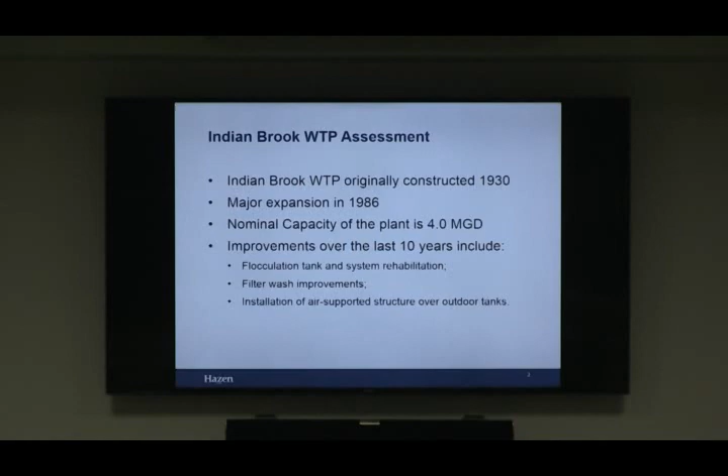The village has been doing a great job maintaining the plant and implementing improvements over the last 10 years to keep it up and running, but it's at the end of its useful life, and it's designed and treating basically 4 MGD.

What is MGD? Million gallons per day—that's the amount of water treated at the Indian Brook water treatment plant right now. Yesterday it was 3.79. It's the beginning of summer, so it's going to get worse over the course of the summer, and demands have been peaking up over 4 MGD.

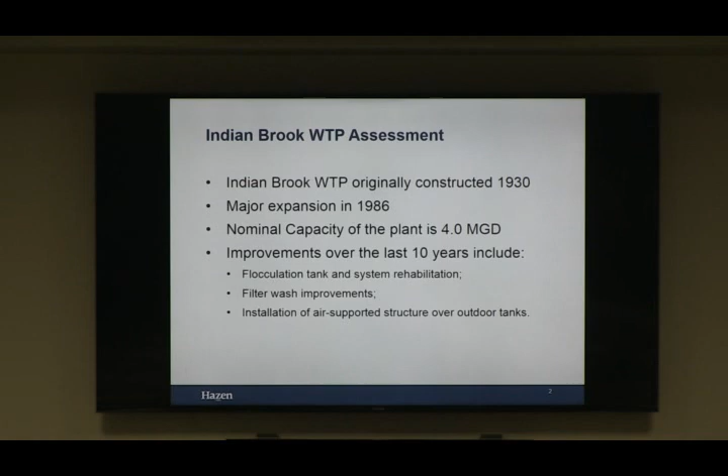So demands are greater than the original design capacity of the existing water treatment facility.

The existing facility and the new facility treat water that is blended from the new Croton Reservoir, which comes down the old Croton Aqueduct to the site, as well as from the Indian Brook Reservoir. The treatment in the existing plant is a series of different unit processes used to bring the water to its final quality.

There's pre-oxidation, coagulation, flocculation, settling, filtration, and then post-treatment chemicals added prior to the water going into a clear well and then out to distribution.

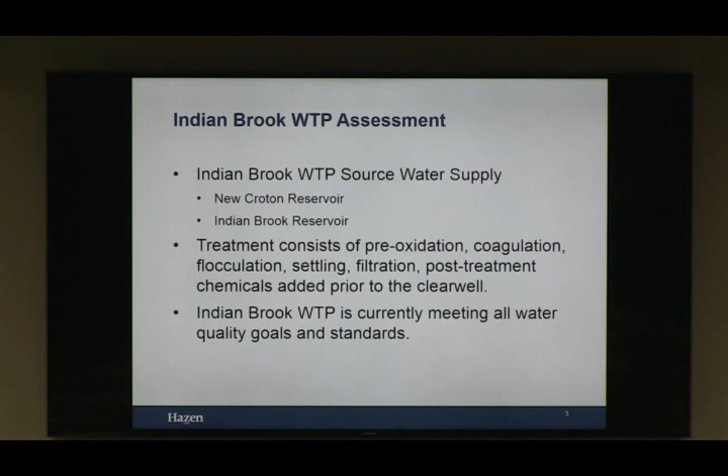Indian Brook Water Treatment Plant is currently meeting all of their water quality goals, but in the future they would likely have trouble as demands increase.

The existing facility is 4 million gallons per day—that's how much water it can treat. The maximum flow predicted in a 5-year projected peak monthly average is 4.5, based on planning information we were given several years ago when studying possible growth in the area and looking at the existing capacity of the Indian Brook water treatment plant.

We also looked out at the plan—4 million gallons, how many people does that serve? Whether it's the village people, the town people, Briarcliff, or whoever. How many people does that 4 million gallons serve? 30,000 people, presently. Thank you.

With the planning information we were given a few years ago, we looked at that 5-year projected peak monthly average. We also looked out 25 years to plan for the future when sizing the plants, and a 25-year projected peak monthly average plus some contingency for emergency conditions, like line breakage in the distribution system, would place the capacity of the new plant being constructed at around 7 million gallons per day.

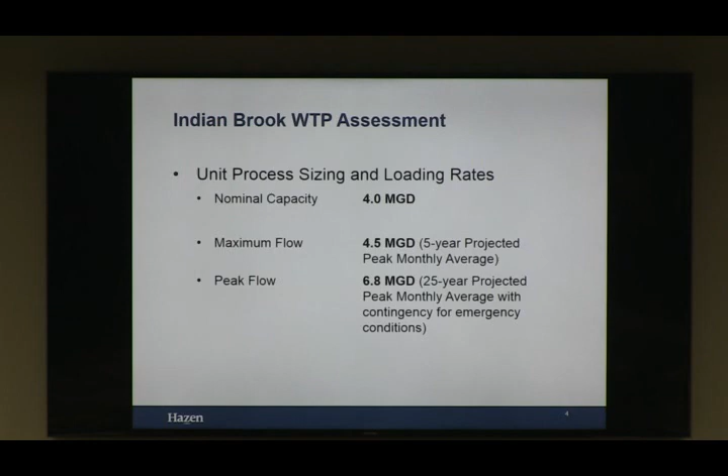This is just showing the different process units in the existing plant. The first thing you do is oxidize the water, then it goes through a couple of stages needed prior to filtration.

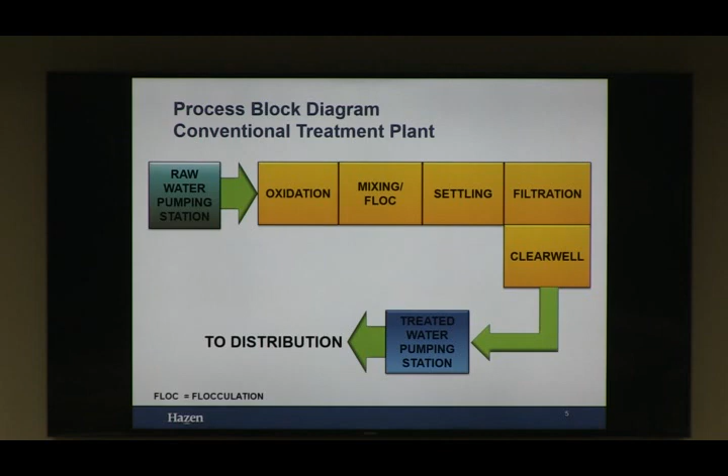So the particles in the water are flocculated by adding treatment chemicals. Then there's a settling step, so the particles are allowed to grow bigger and settle out, and whatever's remaining is filtered in a filter bed, and that water goes to a clear well.

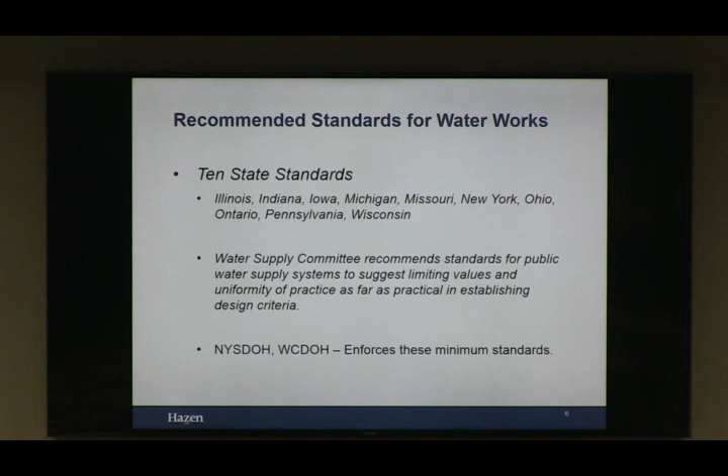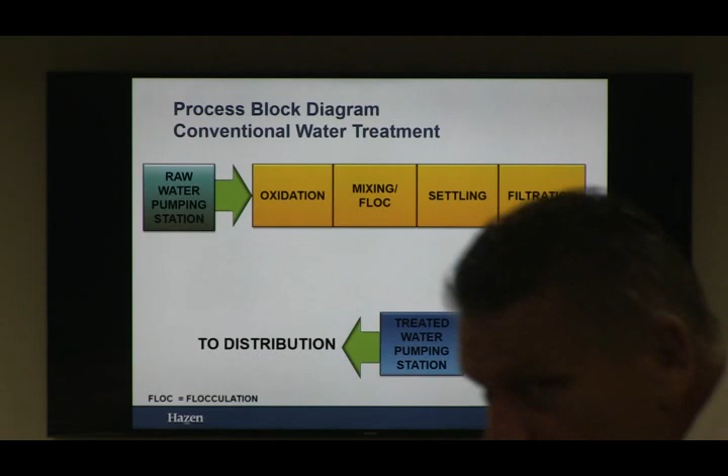When looking at the design criteria for the water treatment plant in any one of these unit processes, we look to meet 10 State Standards—New York State Department of Health has adopted these as the design criteria guideline for treatment. We looked at the existing Indian Brook water treatment plant, and as water demand increases, some of these unit processes won't be adequate anymore.

So for today, with the existing average summer demand, oxidation is sized adequately, mixing is sized adequately, but flocculation, settling, and filtration are not adequately sized for the required redundancy that would be needed, and that would be a situation that gets worse. And the clear well also has no redundancy in it, which is a current 10-state standard or New York State Department of Health requirement.

Sorry, what is a clear well? The clear well holds the finished treated water prior to going out to distribution, and would in this case provide contact time for disinfection.

And the chemicals, is there a list of the chemicals that you put in the water? In this presentation, in the booklet that you have, yes, it would be in the environmental assessment.

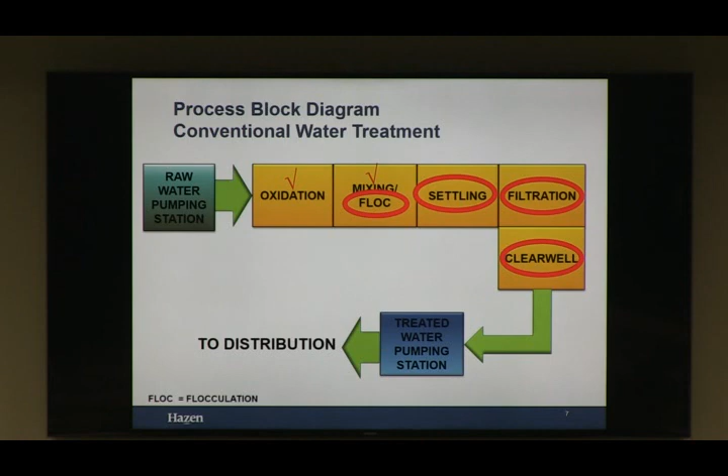So the new process train. I apologize, you're going from 4 million, which we have today, to what size? 6.8. And 6.8 serves how many people? Well, it'll serve 30,000 people, but it's looking out 25 years. To serve how many people, it's in your demand. In the demand projections, we kind of based it on growth. You don't have to give me that number today, but I would like that number. We can formally respond to that.

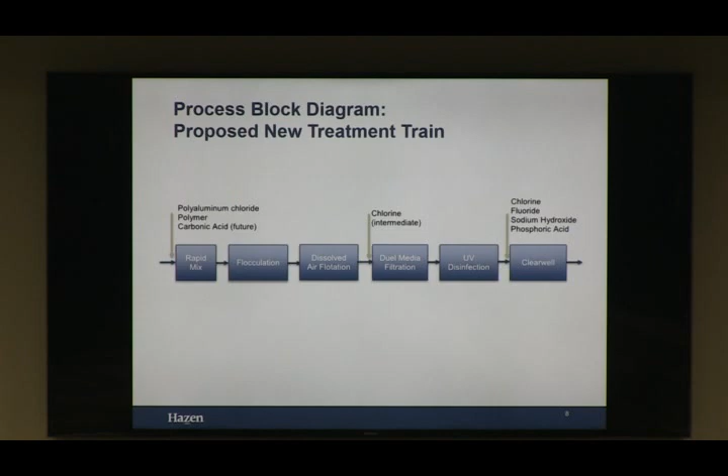So we do actually have a chemical shown here in the process train for the future proposed water treatment plant. So you see the pretreatment chemicals are shown there in the first, the gray arrow showing right before rapid mix. There's a coagulant that's added, that's the polyaluminum chloride, a polymer as a coagulant aid. And then the carbonic acid is not something that's actually in the current design, but could be added in the future for pH adjustment. The water would go into a mixing stage that would just mix the pretreatment chemicals.

Then through flocculation, which I described earlier, which is growing the particles in size so that they can be removed in the further treatment processes. Dissolved air flotation is a clarification process where you inject saturated air into the water and it floats the particles to the top of the tank, and then you skim the particles off the top of the tank. It removes about 90% of the solids in the water, and then what's remaining goes on to the gravity filters.

So the water would be filtered through dual media, sand and anthracite, and then the final water out of the filtration would go through UV disinfection and storage into a clear well prior to leaving for distribution. I mentioned earlier, clear wells are often used to provide contact time for disinfection, so chlorine here would be added for disinfection. And then some of the other chemicals that are added, fluoride, is required in some areas.

What happens if the power goes down in this plant? There's a generator. And how long does that generator last? There's a belly tank on it for 24 hours, and we have a day tank and we have 2 weeks supply. And the generator was just installed 2 years ago.

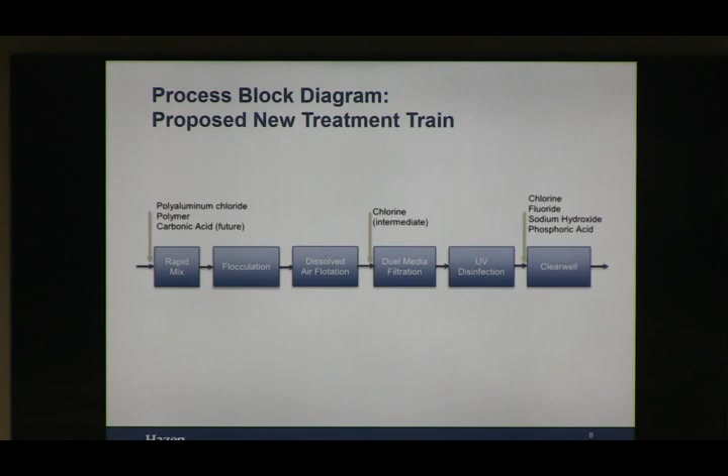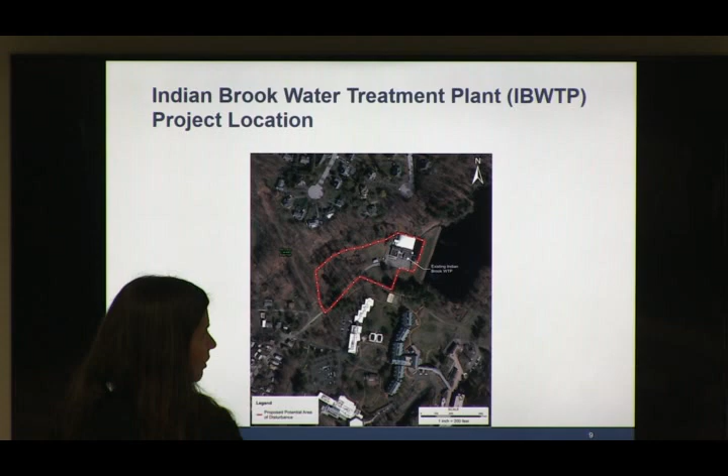This is a temporary structure over the sedimentation basin, and we are looking in this area to have the new water treatment plant located, and here's the Indian Brook Reservoir here with the dam. So if you build a new one, does that white building, which is like a blow-up tent, does that go bye-bye? Yes. Yes.

Lasers don't work on TVs though. Okay, that's the downside of the screens.

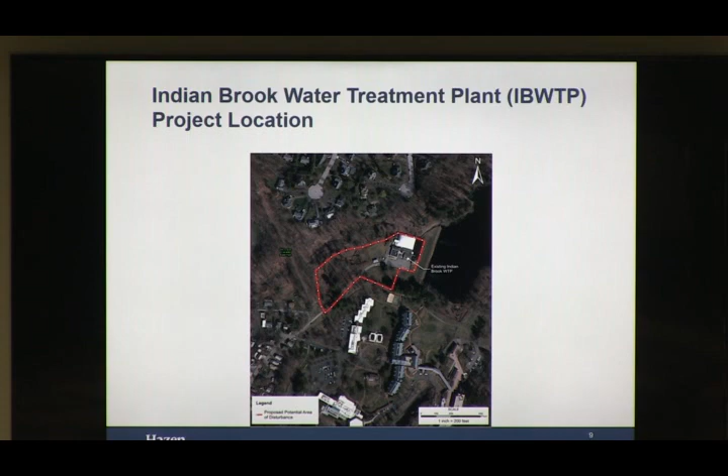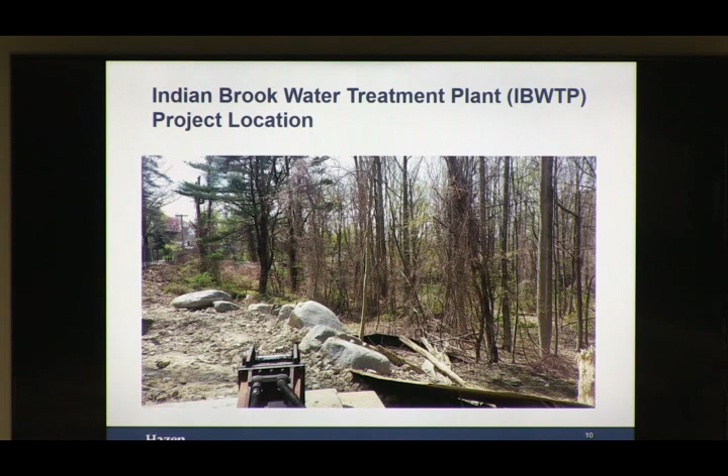Every single tree has been flagged and identified, and would be required to be removed as part of this project. There was a tree survey done last summer, so all the trees were identified that would be impacted by the project, and they would be replaced as part of a program to replace them per requirement for the average diameter of the trees.

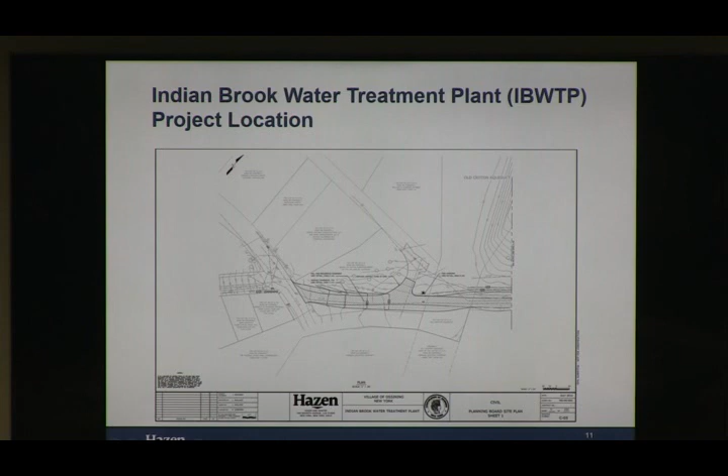So in this area here, we have to widen it in certain areas, but it's basically showing where we'd be repaving the road. This is the overall site plan showing the water treatment plant.

So you're delivering chemicals 365 days a year or whatever it is. Are any of those trucks delivering those chemicals driving on residential streets? Well, the chemicals we're delivering will be the exact chemicals that are currently delivered, but yes, some will obviously be more, for the larger capacity bit, but they have to go through. Right now they're using the same roads at 4 million, and you're going from 4 million to 6.8 million, the equivalent of 2.8 additional tons of chemicals on existing roads.

What are you proposing to do to those roads? I'm asking what you're proposing to do to the existing roads leading up to it, the main private roads, where the people in the town of Ossining have to pay to have their roads paved. Just a question I'm asking—you don't have to answer it today. That's okay.

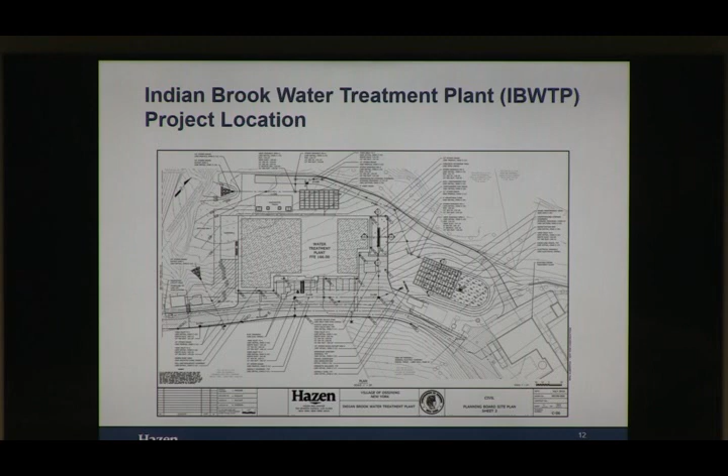Closer to the reservoir, there's one additional building being added. It's a very small building for the addition of potassium permanganate, which is an oxidant. The village has been adding potassium permanganate to the water for years, and although some functions of the new plant will allow for oxidizing certain dissolved metals within the water treatment plant, there are taste and odor issues associated with Indian Brook Reservoir, so we wanted to keep this oxidant in. We're adding it near the reservoir as the water leaves, and on its travel to the new water treatment plant, it will have time to be in contact with the water before entering the new plant.

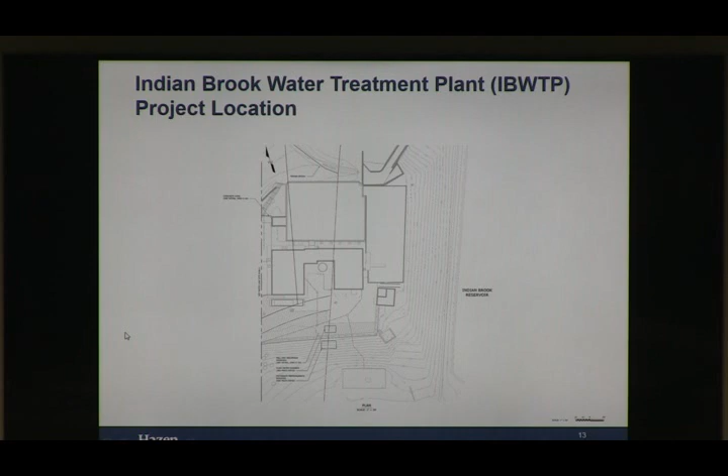Paul mentioned earlier that there was a presentation to the zoning board last month. This site plan was prepared and presented. It shows a couple of items we wanted to point out to the zoning board, and one in particular is the front yard setback, where we're over the 35 feet on the front yard here.

It's about 350 square feet that's over that setback. There's also a wetland on the area, in this section, about 0.14 acres. I have a couple slides that will give exact acreage, and then the town of Ossining buffer for that wetland is shown in this area.

So when you were before the zoning board of appeals, was it just with respect to that one variance, the front yard you mentioned? Correct.

And you're adding how many parking spots to this facility? Eight. One of those is a handicap spot.

It's a stupid question, but it has a thought - do you presently use salt on the roads in the wintertime? The town does. The town does. Okay.

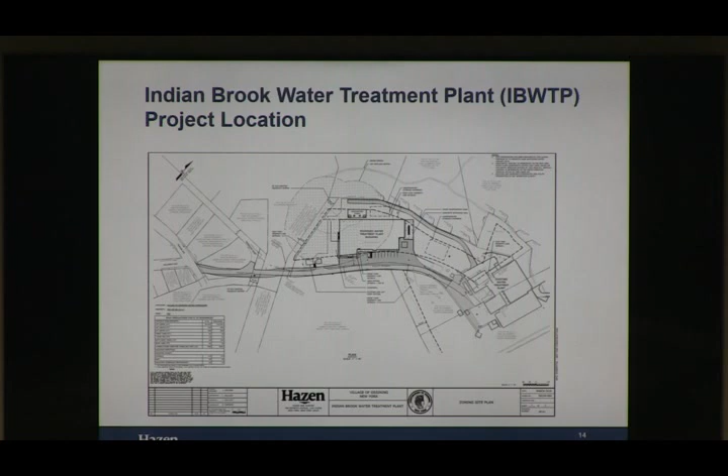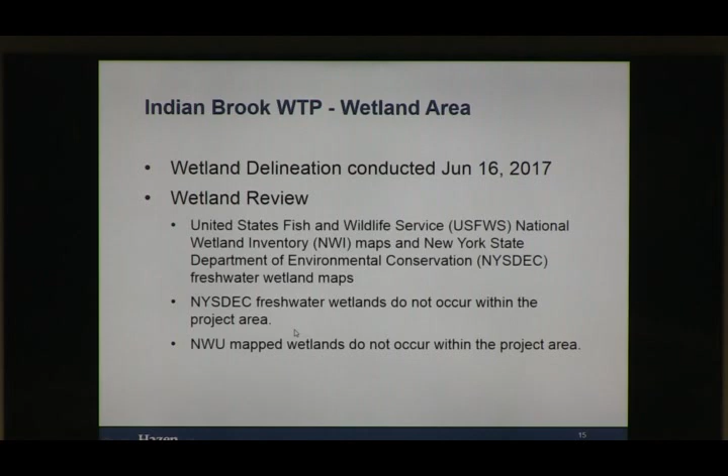Last June, we did a wetlands delineation to identify the extent of the wetlands on the site. We reviewed wetlands maps and looked into the United States Fish and Wildlife Service inventory maps, as well as the New York State DEC maps. This wetland area is not actually flagged as a DEC freshwater wetland or a fish and wildlife wetland.

So although it is a wetland, it's not identified by those regulatory agencies. As mentioned, the wetland size is 0.14 acres. It's hydraulically driven by what we believe to be a spring or seep located downslope by the pump station of the existing plant, and we're going to wind up impacting it through construction since part of the water treatment plant is sitting in it.

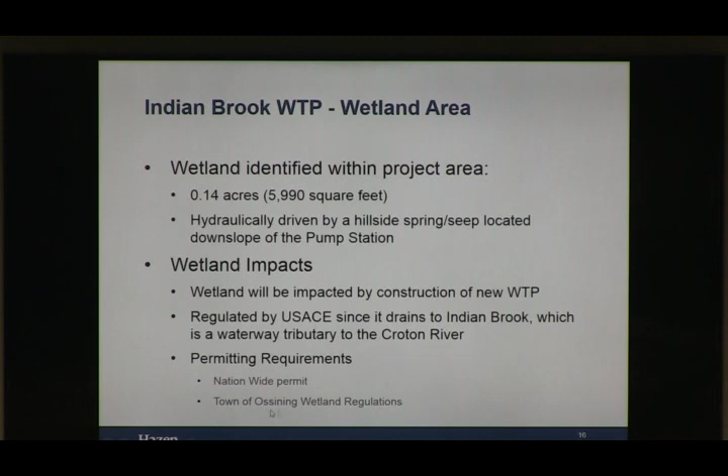So we'd be looking to mitigate the impacts. The permitting requirements are a nationwide permit, and of course the town of Ossining wetland regulations. For mitigation, we'll have to do a one-to-one mitigation, not of the 0.14 acres of wetland area, but the buffer area around it, which comes out to about an acre.

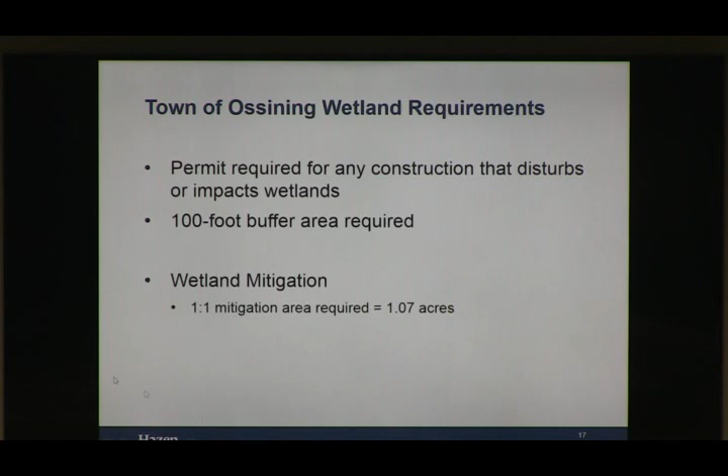As mentioned earlier, there's a number of trees that are going to be disturbed. The area spreads out over an acre and a half, specifically 91 trees. The mitigation requirements are to replant 50% of the total aggregate diameter of the trees, and we'd be working with the town and village of Ossining on a tree restitution plan, which would include some on-site plantings but could also include off-site plantings.

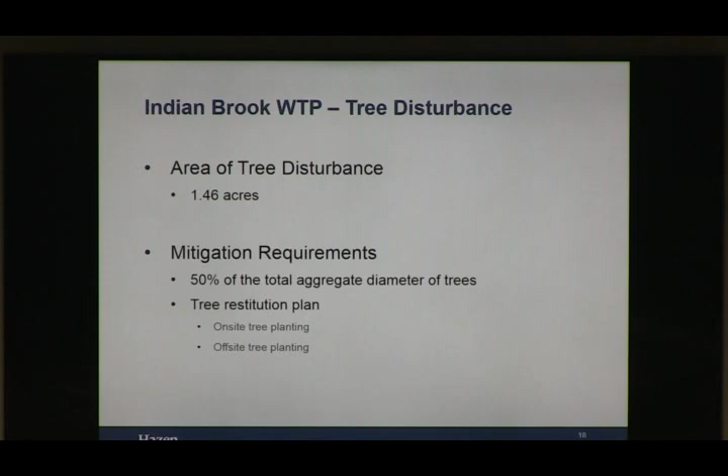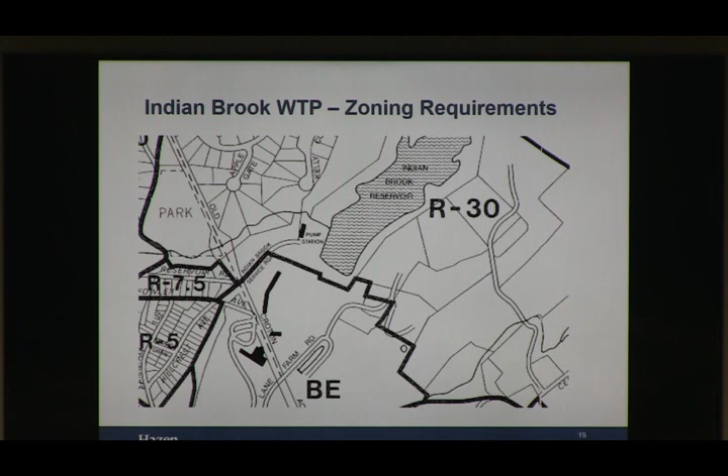So the water treatment plant falls in R30 for zoning requirements, and the R30 requirements are shown here. Specifically, I mentioned the front yard setback of 35 feet - we were a bit over that one. The rear yard setback, we fell within, and the height requirement, where the stair tower is at 34 feet, and the height requirement at the base of the building is 35 feet.

What is that stair used for? To access the various levels of the water treatment plant and the roof. And since there's a green roof up there, the maintenance people working the plant would have to get up there more frequently than typical.

There's also HVAC equipment on the roof. In the tower from the ground, how many feet above the roof is that tower above the roof? 14 feet, with the parapet, about 15 feet.

I'd like that dropped down - a legal height of a door is 7'6", I'd like that to be 6'8". Dropped to 6'8", yes. And maybe a 9 foot high ceiling instead. I mean, it's too high - it's too high for a residential neighborhood.

It's just the one first comment I'm giving, I know I'm going out of sequence, but the tower's just too high. Okay, we will definitely look at how much it could come down while still allowing for code height. There's 2 levels of the roof.

There's an upper roof level and a lower roof level, so it doesn't have to be an enclosed stair - it can be an exterior stair. You can talk about it later.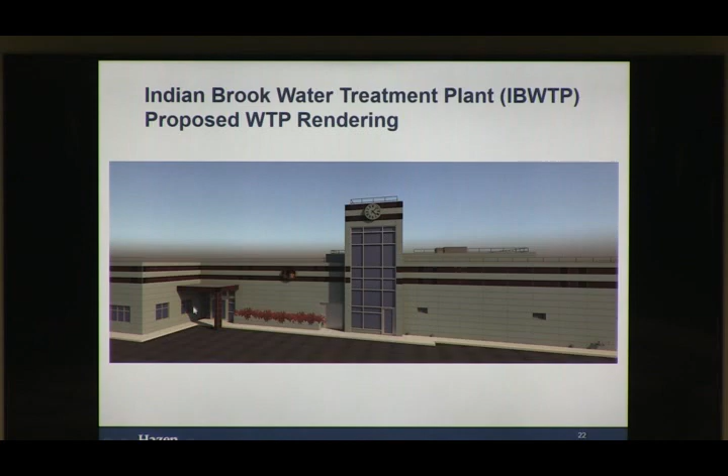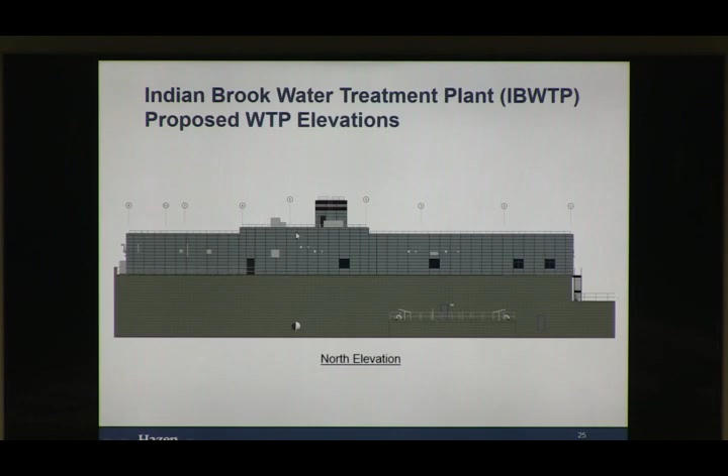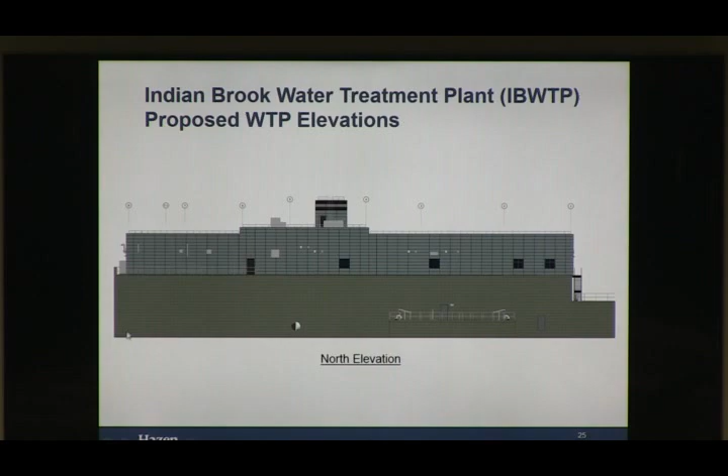Then the north elevation is basically the back of the building that I was describing before. Since the site drops off steeply, right about here is the grade that matches up with the road. Then the lower level, which is a lot of tankage in this area of the building, is exposed on the north elevation. There's also a tank back here that holds wash water from the filters that's recycled back to the head of the plant.

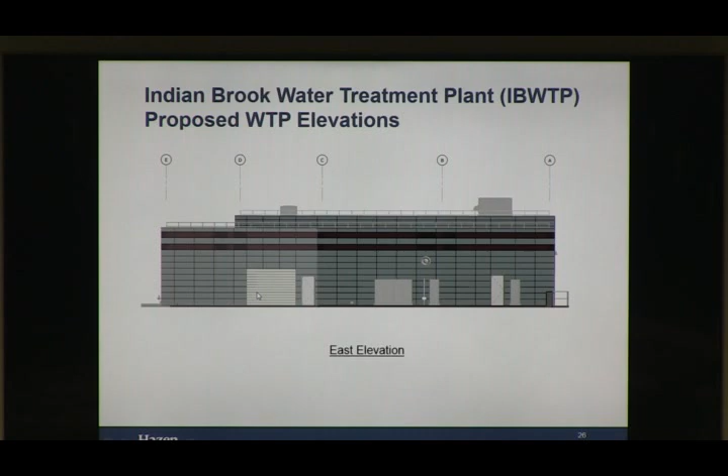And then last is the east elevation, and this is the area where the chemical delivery trucks would pull into and unload chemical. There's cabinets for different chemicals on this side of the plant, and there's a roll-up door that would allow for equipment to be brought in and out of the plant.

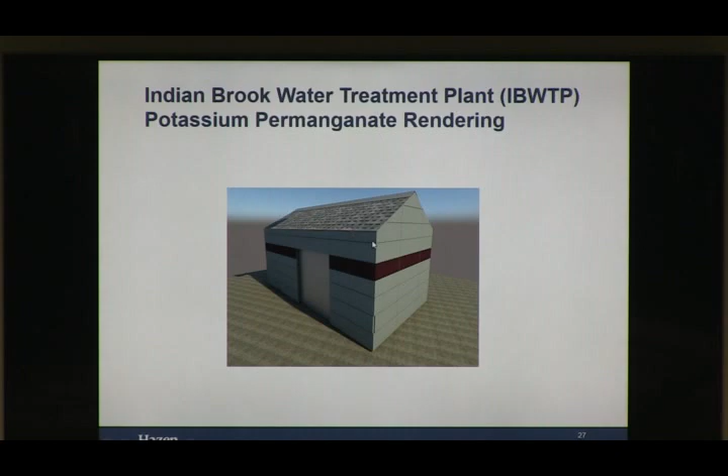And the small building that's located over by the Indian Brook Reservoir would be a facility containing potassium permanganate, and this is a rendering of what the facility would look like. Right now, the proposal is to have terracotta rain screen located on the...

Are any of those chemicals able to cause any type of fire or explosion? So the chemicals are non-flammable, every single one of them.

And your report shows that for every single one of the chemicals? They're non-flammable, but we have located sprinkler systems in the chemical area. I would like to see in the report, in big red, that every single one of those chemicals being used is not explosive or dangerous if, God forbid, something happens to that building.

Okay, I mean, there's... we provide the residents that live nearby with SDS sheets for them, so that they can get the information they're looking for. I just know off the top of my head that they're non-flammable, but I don't want to speak to every single characteristic of each chemical, but we can provide the SDS sheets.

So the cladding for the building is this terracotta rain screen. It's being located on the whole entire upper level of the building, and then the lower level, as we're showing around the back of the building, or the north elevation, would be concrete on the lower level, which is the outside of tanks for most of that part.

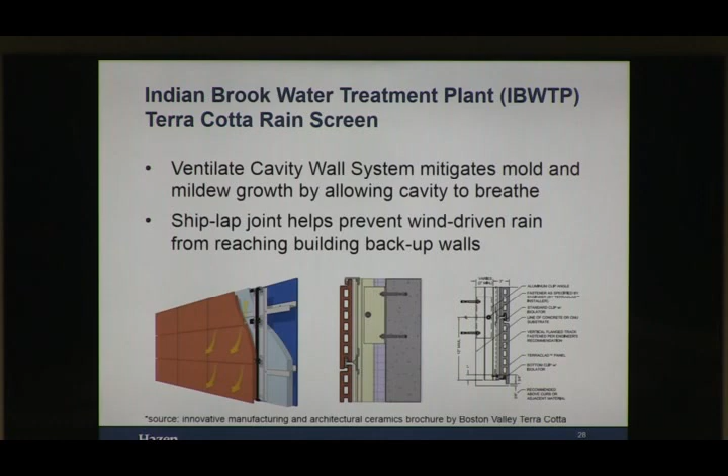And then I started talking a little bit about the green roof already. There's a lot of benefits for the green roof, other than stormwater management. It also mitigates heat island effects and keeps the building cooler. It also reduces dust and smog levels by trapping particulates, and it reduces the rainfall volume and stores some of the rainfall before it's released on site to the storage chamber I was pointing out earlier.

And most importantly, the reason why we added it was for filtering the stormwater to provide a certain level of water quality. In addition to that, it's more attractive to have the green roof on the roof of the building for neighbors who are located at somewhat of a higher elevation on the other side of the tree line.

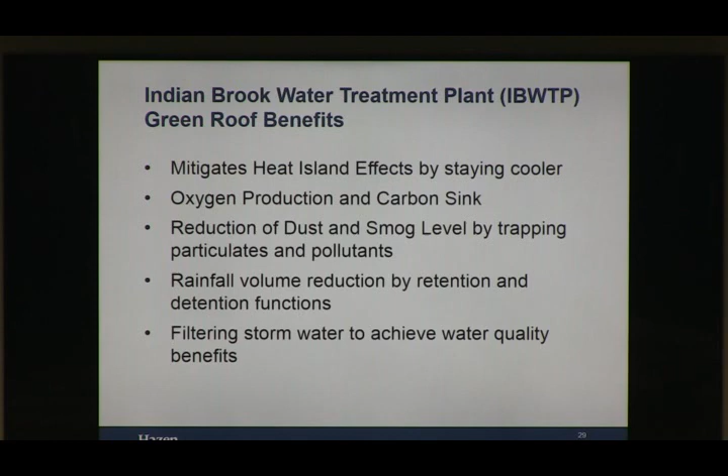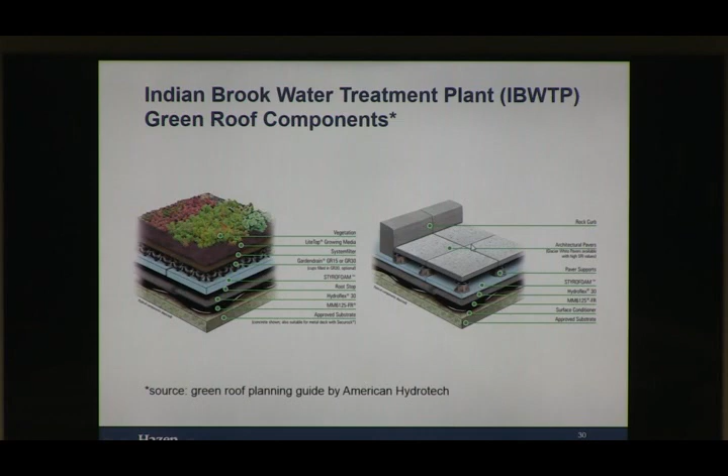We do actually have a sample of the green roof. We might be premature at this meeting, but we have a sample with us. It shows the layer system of the green roof, and in the areas where we wouldn't have green roof, it would be a similar system, but we'd have pavers.

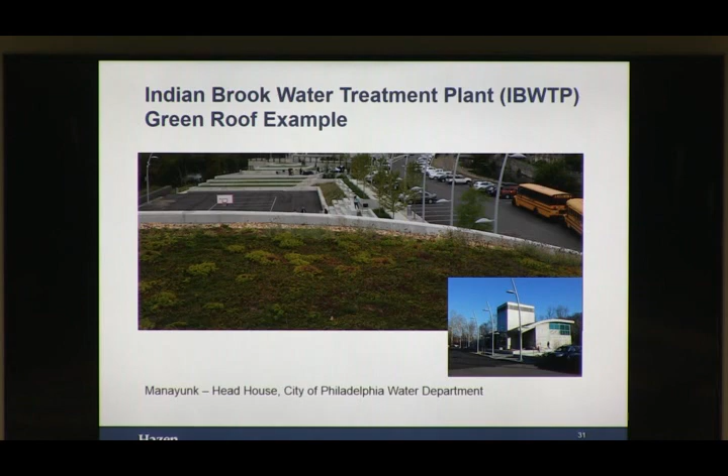And this is an example from a project that was recently completed, a pump station in Philadelphia that we designed, and this was the final product of what the green roof looked like. Usually, species that are appropriate for the area are selected, and they would need to be low maintenance species as well.

And then our next steps, we believe, would be, once we're through planning board, we would meet with the zoning board, and then we will submit the project to the Westchester County Department of Health for approval. And I can take any questions at this point.

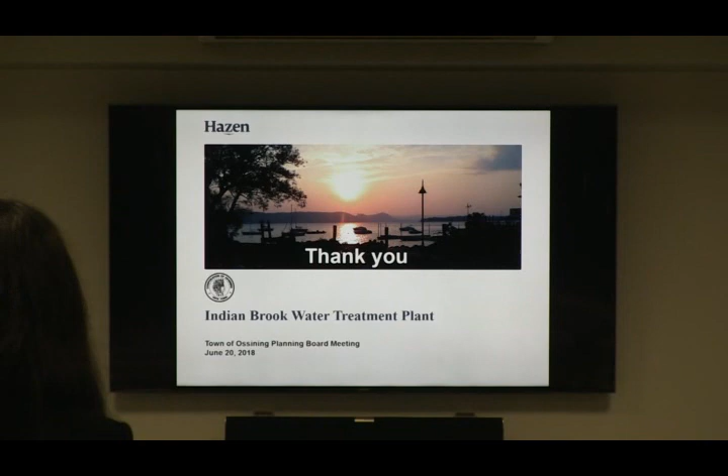Any further questions? Do we need to take any steps here at this point? It would be good for the planning board to declare its intent to be the lead agency tonight, in terms of the SEQR process. So you might want to adopt a resolution to that effect.

Okay, is there any members of the public who wish to comment at this time? Okay. Anybody want to make a motion?

So I have a few questions, if you don't mind.

First of all, I want to say that Ossining's water is already really great. It meets all the standards. I read the brochure sent out annually, and the numbers are all good. Since they're all below national and state standards, one question I have is, will this new technology improve those numbers still further? Or are you just going to target the same levels, for things like lead and other heavy metals, cadmium and so forth?

So the dissolved air flotation clarification process will provide some improvement over the sedimentation process in a major storm event, I would say, where the sedimentation process wouldn't be able to handle it as well. I think the biggest thing to focus on is that, yes, they're definitely meeting all the regs, and we're designing to meet regs in the future. So even if there's a slight improvement in the water, it's still really just looking at meeting the regs.

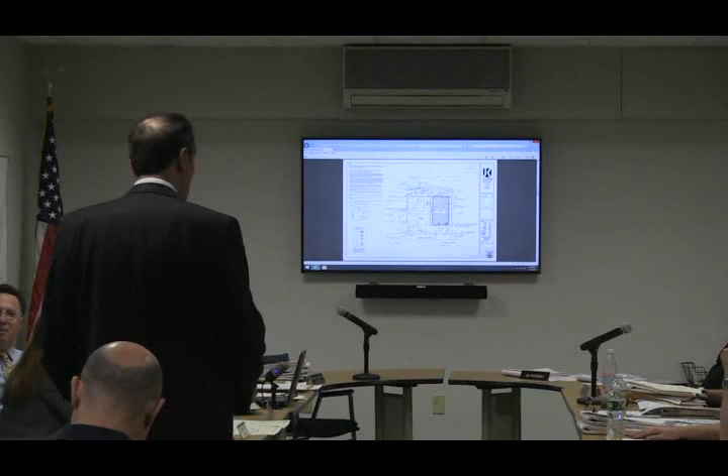Number two, if you put it parallel to the street, at the end of the day it's not going to create a streetscape because the parking needs to be near the entrance, which means the parking is in front of the building. It's not feasible to have an entrance facing the street in the primary facade and then put parking in the back so the children have to walk all the way around the building. So what they're asking, we don't believe makes sense, and it would not be our intent to go in that direction.

The other issue, which is not as problematic but I don't think it works, and it's also generic, is on this site the idea of using natural means of stormwater management as opposed to subsurface is probably not practicable given the site's constraints and configuration at this point.

I'd like to address a few comments. Sure.

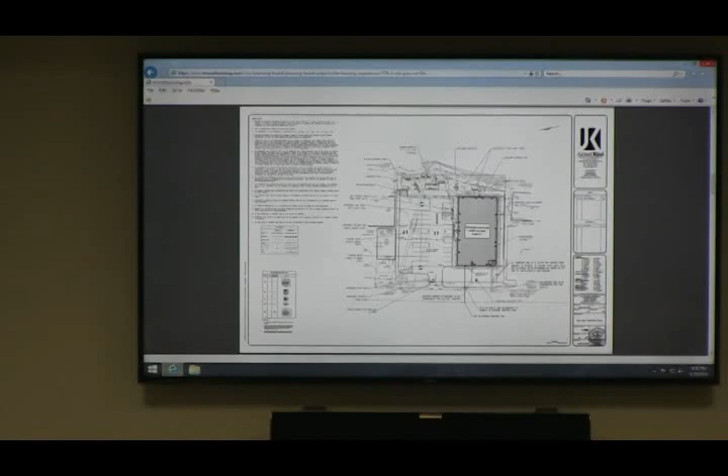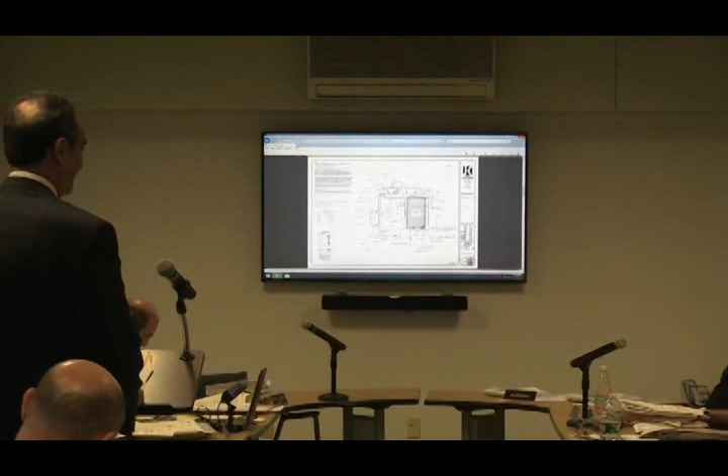I actually went to the site yesterday. I purposely went as it was getting dark. I took my dog with me, not that it really means anything. I parked in front, where the culvert is right on North State Road, where the two 4-foot diameter pipes are. I took the dog on the lead right down into it, and immediately I saw fish scatter. As soon as she put her paws in the water, they went in both directions.

Then I saw a frog, and I was amazed. I was like, wow, this is very interesting. Then it just went right into the pipes. I'm like, well, where does this really go? Obviously there's a gate across the front, so you really can't see when you look.

But if you walk to the right of the property, Jason, where the karate place is, and walk along that part to the back, there's a fence behind it facing the property. You look over the fence, and I was like, oh my gosh, there's a whole stream here. I mean a big stream, which really starts where those 4-foot diameter holes are.

And then I took a few pictures of that, I have them on my phone, I forgot to print them out today.

Then I looked to the right, and behind the karate place, the stream just stopped right there. There are pipes also, I would assume they're probably the same 48-inch type pipes, that go behind the karate place, all the way to the next property over, and then continue on down. It's part of the Pocantico River system. Where this stream that runs underneath this property starts is in Ryder Park, Highview Farms, through Ryder Park, all the way down to where the Flames Steakhouse is across the street.